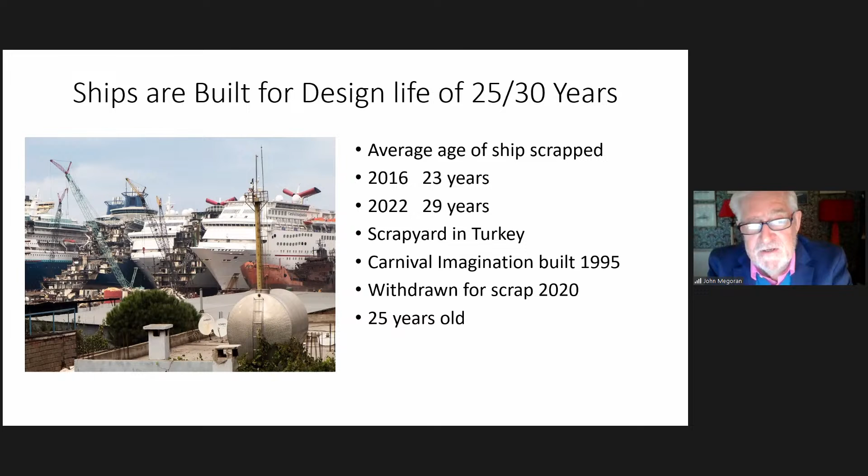So once again, 25 years old. There is this magic figure of 25 to 30 years as the design life of a ship. Of course, you can extend that by careful maintenance, really looking after it, not sending it out too much in the hurly-burly and such like. But basically, ships are designed for a life of up to 30 years, after which it is expected, generally speaking, that they'll be scrapped.

And of course, if you do nothing to a ship, they deteriorate readily. We have a good example with the Ryde, built in 1937. She had a major rebuild after the Second World War, having run as a minesweeper during the war. She was withdrawn in 1969, 32 years old, slightly over 30 years, but she had had that rebuild.

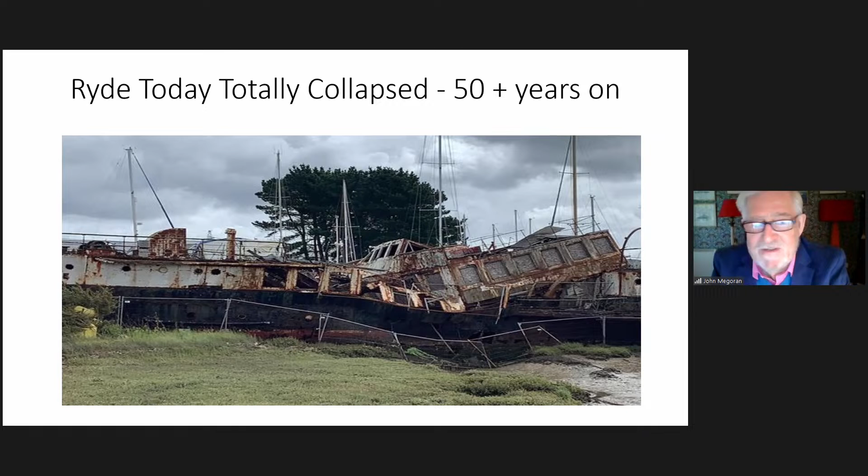Here's another example, the USS The Sullivans. She has been open in Buffalo Naval Park in America for some years. She was built in 1943, but she sank in April of last year. They knew that there were issues with her hull, and in fact, she had constant bilge pumps going on. But one night, the holes got bigger, and eventually they found that she had 53 separate holes, and she sank.

And that is also a good reminder of the importance of checking the draft marks on ships. I remember I used to always say to the crew on KC, check the draft marks when you come aboard. And I remember one guy saying to me, 'Oh, well, are you expecting the ship to sink then?' Well, no, I'm not expecting the ship to sink, but if it has got issues, I want to know about it sooner rather than later.

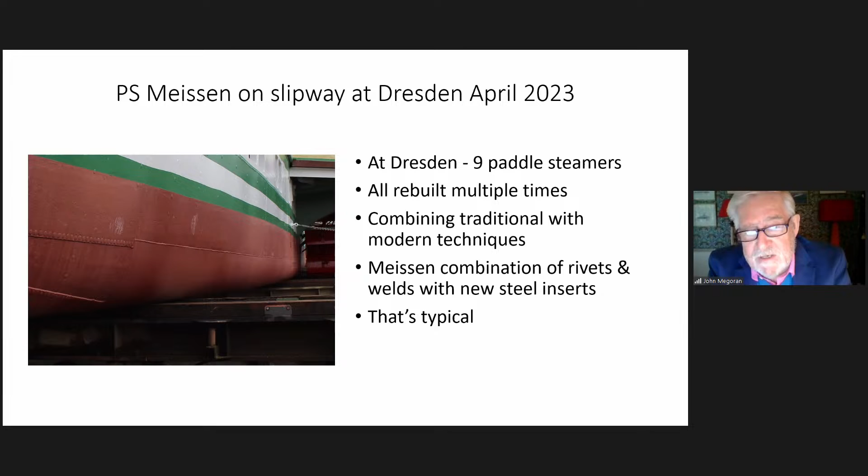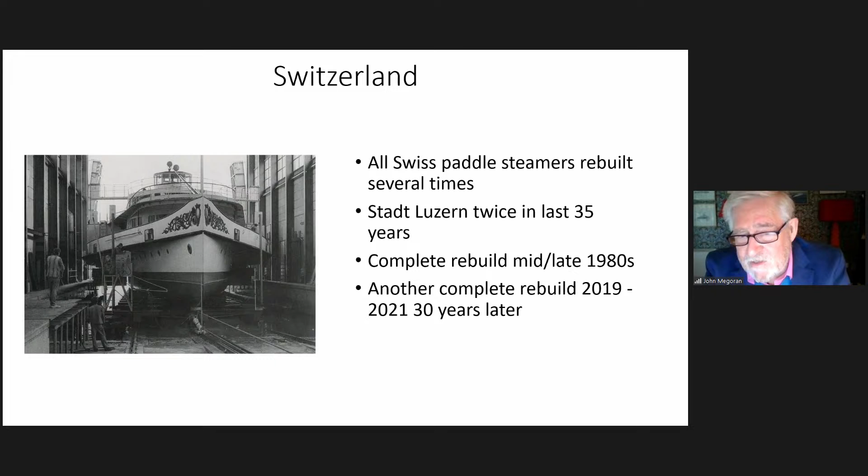As we know, all the Swiss paddle steamers have been rebuilt several times. The Stadt Luzern has been rebuilt twice in the last 35 years. When I first went there in the late 1980s, she had just emerged from a rebuild, and she was taken out of service for another complete rebuild, 2019 to 2021.

And the same elsewhere in Switzerland. Recent examples on Lake Geneva: the Vevey was rebuilt 2012-13, the Italie 2015-2016, the Rhone 2019 to 2021. And for this, they're taken back to nothing. The steel work on the hull is renewed as necessary. They don't renew steel if it doesn't need renewing, but they renew the steel that does need renewing, and completely redecked. And that really is the template for the work that we've done on KC.

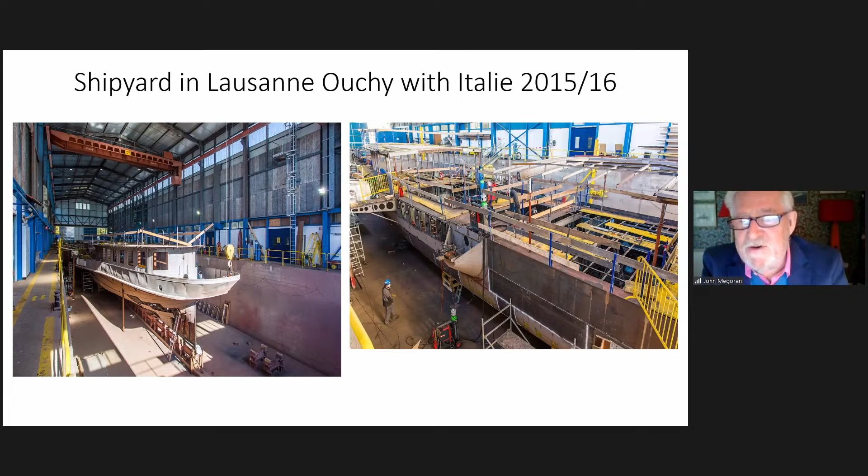And there is the shipyard, the covered shipyard at Lausanne Ouchy, with Italie there, 2015 to 2016. And that gives a flavour of the quantity of work that's going on. So when you go on the Italie today, you are going on a paddle steamer built shortly after the turn of the century, but a lot of it is different. The decks are not the same, a lot of the steelwork, etc., is different.

And of course, we all know our own Waverley. Built in 1947, she was sold at the end of her design life in 1974 when she was 27 years old. The following 25 years, there was an enormous amount of steel work done to her in the winters, and decks, etc. She had a new boiler in 1981. And then, as we all remember, a complete rebuild at Great Yarmouth in 2001. So if you want to keep ships sailing, you have to keep rebuilding them, and you have to somehow find the money to keep doing that.

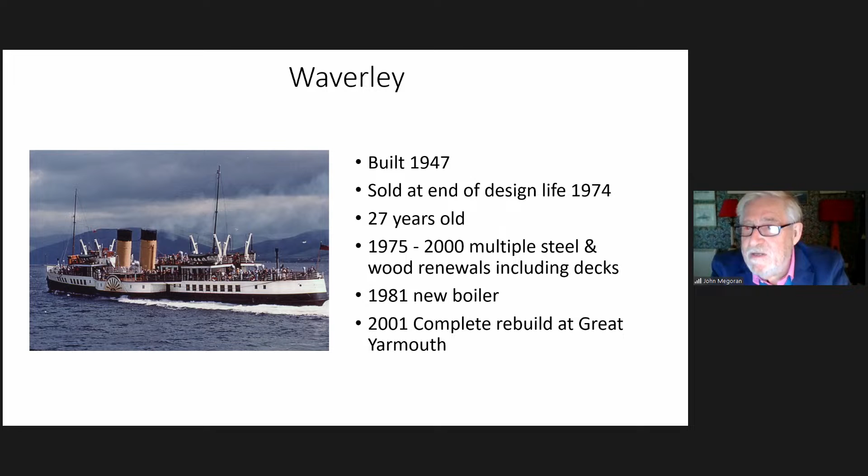So to KC. Well, she was built in 1924, and she was 36 years old, so she was already beyond her design life. Although during the war she hadn't run that much, but she was beyond the design life. To demonstrate this 30-year rule once again, the Board of Trade in 1960 was saying you're going to have to do major work on this ship if you're going to keep it in service. She needed hull doubling, she needed a new boiler, and so there were discussions as to whether it was worth doing the work or not.

At that time, the River Dart Steamboat Company had been taken over by Evans and Reid of Cardiff, and we have in our archive some correspondence between the two, with the Dart Company saying, is it worth doing this work given how old she is? And against the odds, Evans and Reid saying yes, go ahead, we need it. Because in 1960 the business was still quite buoyant on the Dart, with three paddle steamers with passenger certificates for more than 400. They could put 1,200 people afloat at any one time, and they needed that capacity. So she had that work done. In fact, the new boiler they put in was very handy when we came to start running KC on the Medway, because it had not had that much use.

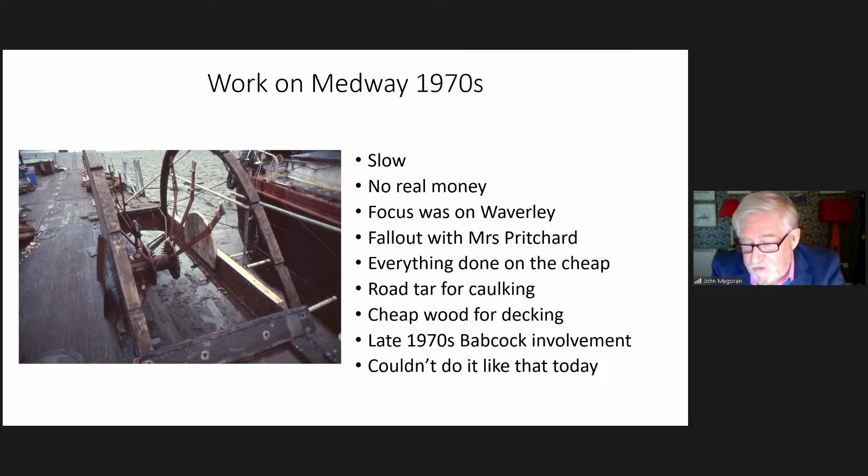It was really in the late 1970s when Babcock became involved and started providing real expertise to underpin the project that it really took off. But I don't think you could do it like that today, because today the MCA are interested in every facet of what's going on - you have to provide certificates for this and that, and make sure the steel is just so. So I don't think you could do that today. But they did, and all credit to them - huge respect for what was done in that period.

But it wasn't long before we discovered that really she still needed a lot of work. The hull condition - not really a lot had been done to the hull during the 1970s. And I remember one terrible day when I was chipping away with my hammer underneath, and my hammer went up inside the hull and knocked a hole in it.

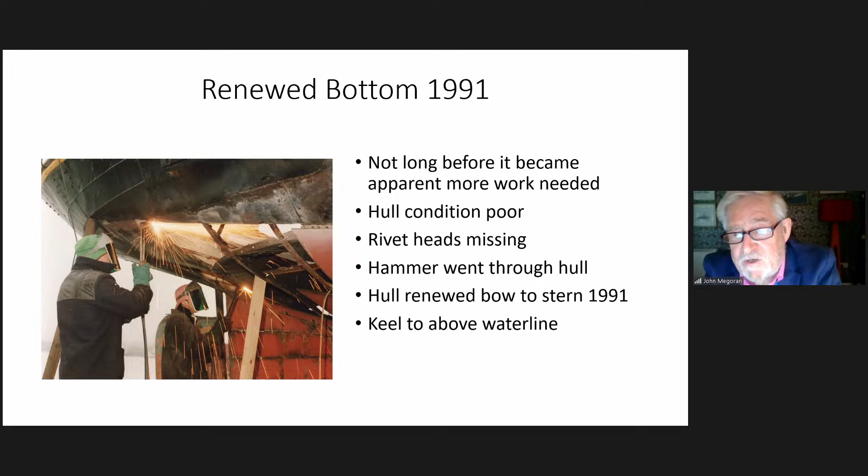And if you looked - I remember the MCA, or whatever it was called then, the Department of Transport surveyor, Mr. Ahmed, saying to me, 'John, there's a bit of hull here, these rivets, they don't seem to have any heads on them.' And he was right, they didn't. So in 1991, we got the funding to renew the whole of the bottom, and so the whole of the bottom was renewed from the bow to the stern and from the keel to about a foot above the waterline.

The 1961 boiler lasted very well, but by 1999-2000, the insurance surveyors were making issues with it, and so we put a new boiler in from Wellman Robey, pretty much identical, a carbon copy really of the earlier boiler. And we were pretty insistent that it would have the domed ends. Most modern boilers have got flat ends, like a Smartie packet with a thing stuck in each end. The traditional boilers had a domed end, which is better for expansion.

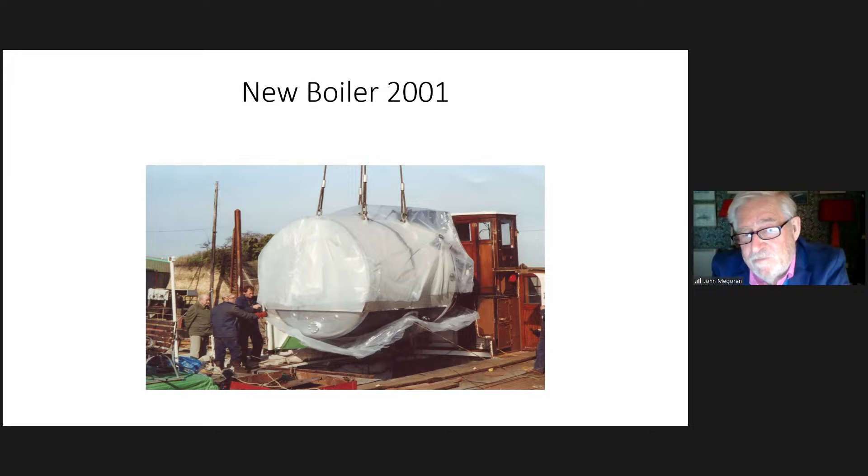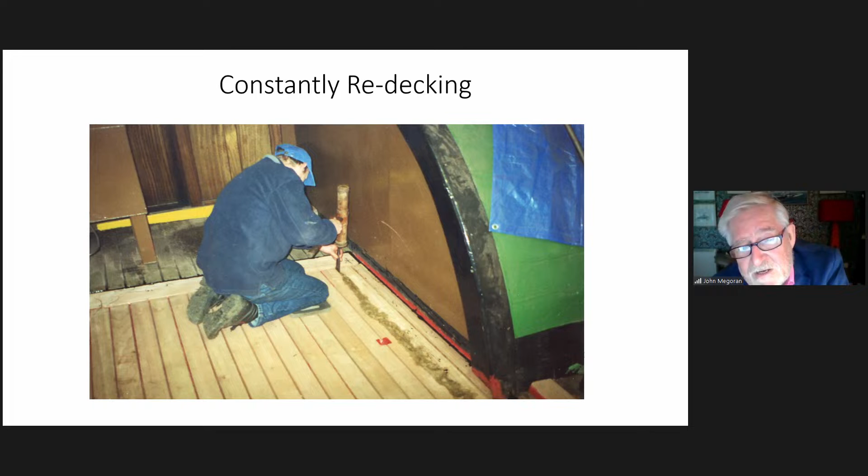Decks. One looks at decks and thinks, oh well, these go on forever, but they don't. We renewed decks in the Medway years more than once. And there is Chris Smith - some of you will remember Chris. He was my right-hand man at Chatham, a really great guy and huge contributor to KC, who very sadly died at the age of 62 back in September.

We had a legacy in 2001, and we used that to renew the sponsons there in the Acorn shipyard at Strood. And in 2008, some of the steel work around the bow above the level of the steel that we'd replaced was so bad that we actually put a completely new bow on in 2008.

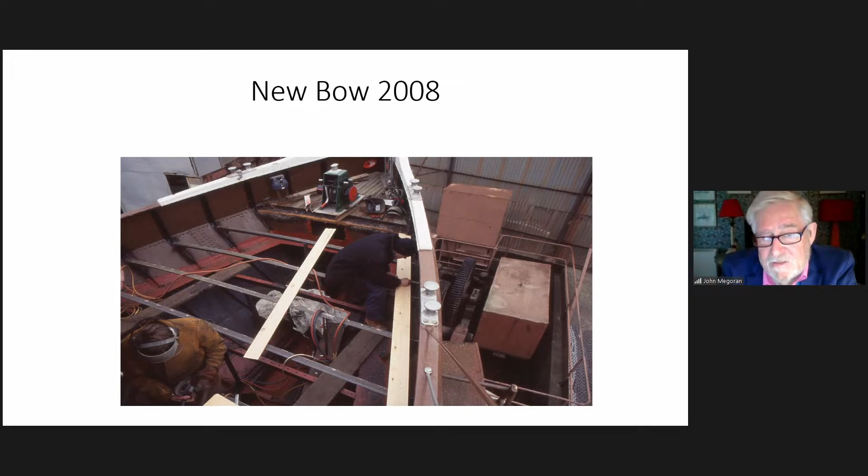And the paddle boxes, which had been renewed in the 1970s, they were falling apart by 2005. So there's Chris Smith again in his blue hat, renewing the steel work and then the woodwork around the paddle wheels.

One guy from the 1970s who was important in two respects, Laurie Beale. There were plans to get rid of KC in the 1970s because things were not working out too well, but Laurie stepped in, and with him there, that didn't happen. And Laurie's other main contribution was that he provided the paddle wheels. He worked for Stone Manganese, I think it was called, and they built these two paddle wheels free and gratis for KC. So that's a major contribution from Laurie, which lives on today.

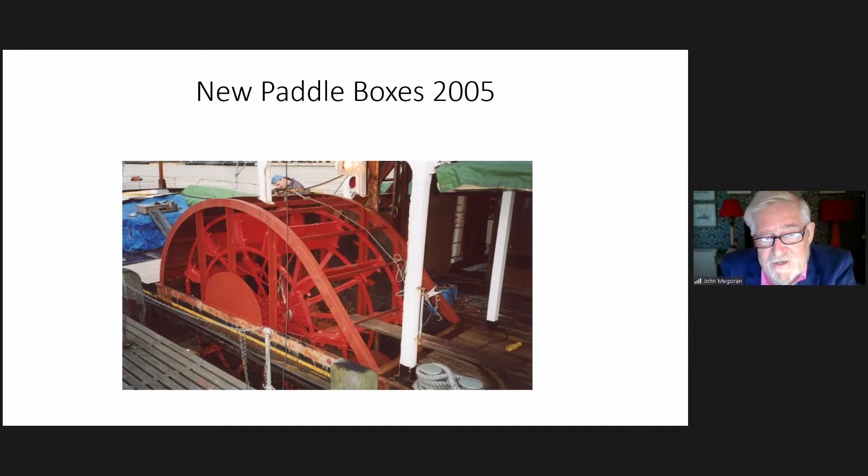And in 2010, we had commissioned a brand new coach roof. So there's a lot done in the Medway years to improve the ship.

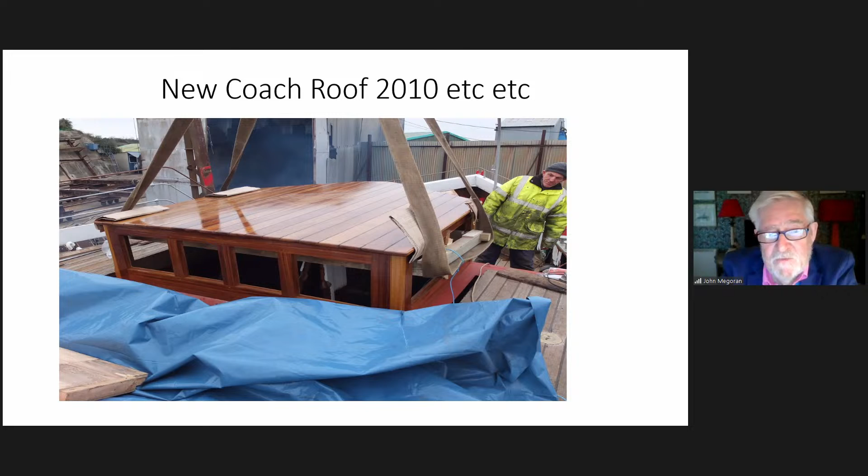Which of course then raises the question, why rebuild her in 2020? And we look at all the work that has been done previously, but in 1985, when we put it back into service, up to 2020, that's 35 years. That's again beyond the design life of ships. And remember KC, as we saw a moment ago, 1924 to 1960, that was 36 years, and they needed steel work on the hull and a new boiler.

And by 2020, the new hull plates we put on, they were 30 years old, so that's the ship's design life. And the frames and the bulkheads, the stringers and the keelson had never really been addressed. And our new decks were now starting to go rotten. Now, of course, amongst that, some of the work that we did was fine and hasn't needed addressing, as with the Swiss rebuilds - you don't replace everything just for the sake of replacing it, you replace what needs replacing. But after 30 years, a lot does need replacing.

But then there's the vexed question of how do you do it, which people exercise themselves over sometimes. Particularly, should it be done absolutely in a traditional fashion with rivets, or should modern techniques be used with welding? Well, the problem with rivets is it's difficult sourcing the necessary skills. Ship riveting hardly exists today.

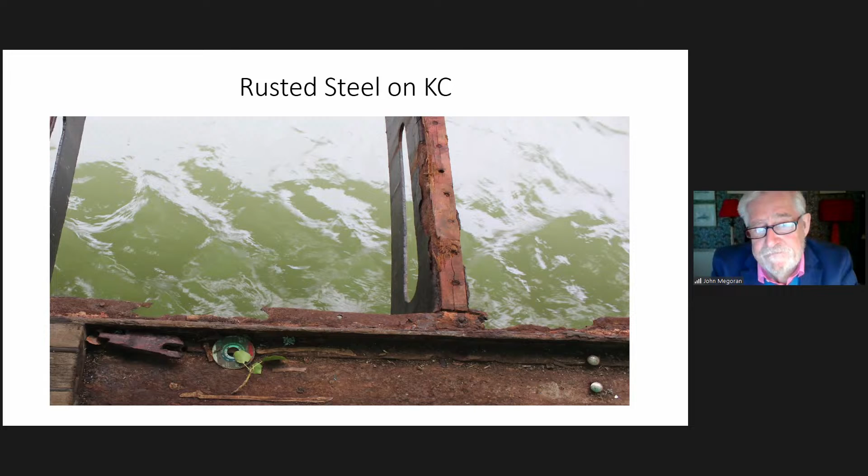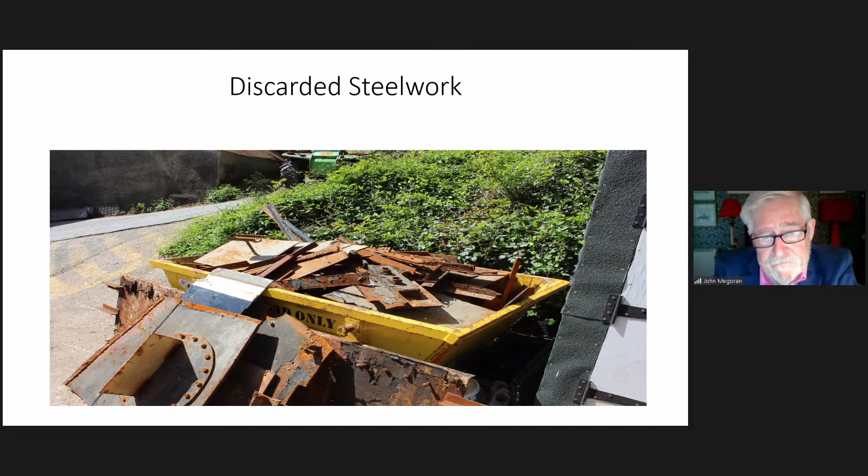And there is some of the discarded steel work which was cut out from the ship. And some of the new steel waiting to go in, which, as I say, now all has to come with appropriate certificates, etc.

One also needs to remember, in terms of the longevity of these paddle steamers, that they were often very lightly constructed, to keep the draft down so they could go to piers in shallow water. And when on the Dart, Totnes pretty much dries out - low tide, you can only get in there 2 or 3 hours either side of the high water. And so the steel plate is not thick.

I mean, KC's steel plate is 6 millimeters and 8 millimeters. It was initially built in strakes of 6 millimeter and 8 millimeter, etc. And if you get your ruler out and look at 6 millimeters, that's not terribly thick. So you haven't got to start getting much pitting before you're almost going through.

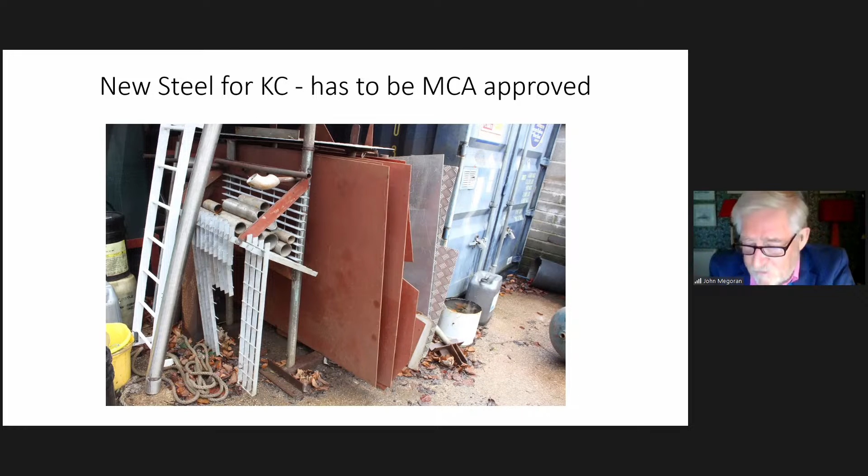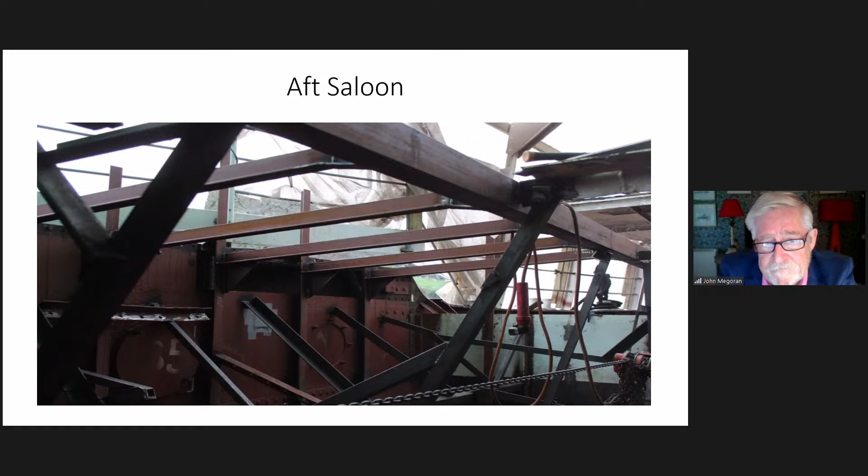As built, Kingswear Castle's deck all had steel tongues in it, and that gave added strength to the ship. We replaced that idea in this rebuild with putting in a thinner steel deck with traditional wood on top, so you won't notice any difference. But putting that steel deck in adds a lot of strength to the ship. One of the problems, particularly with KC, is that she hasn't got a lot of longitudinal strength.

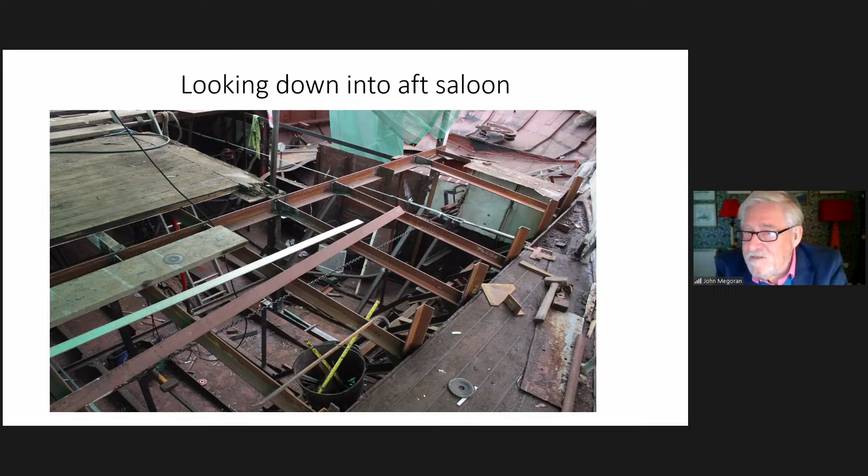She's quite a long ship, 112 feet, with no binding superstructure. Therefore, if you're in any sort of lop - and she wasn't built to be out in any sort of lop, but on the Medway and the Thames she sometimes was - the bow and the stern being lifted up at different rates causes flexing. Not massive flexing, but flexing. But anyway, this hopefully will strengthen the ship, has strengthened the ship considerably.

When we did the bottom, it extended only about a foot above the waterline, and the bit above that, from the new steel up to the deck, was original. And we found, as the years went on, that some of that was getting very iffy, particularly up underneath the deck, and those surveyors know just where to look for these things.

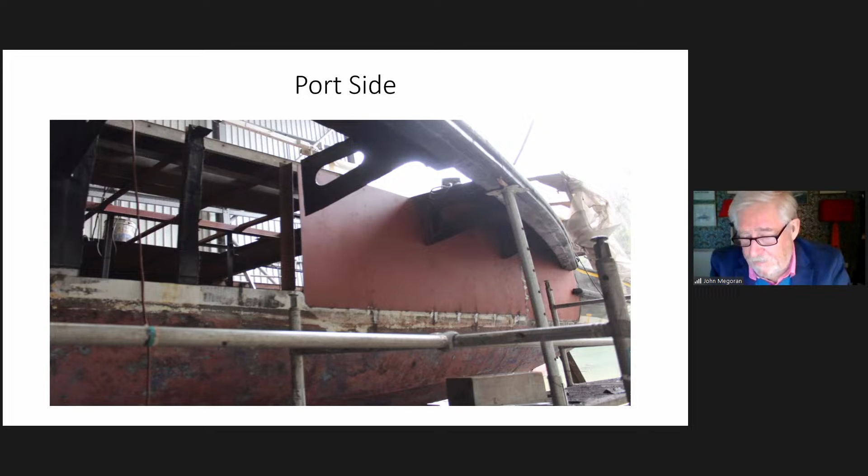Surveyors would go around with a hammer, bang, and the hammer would go through. So we have renewed, from the engine room to the stern, that strake beneath the deck, and you can see there on the right side the new steel being put in. And there it is, painted with that anti-corrosive grey paint.

A lot of the hull from 1990 - we had to put some inserts in some places, but on the whole that has lasted not too badly.

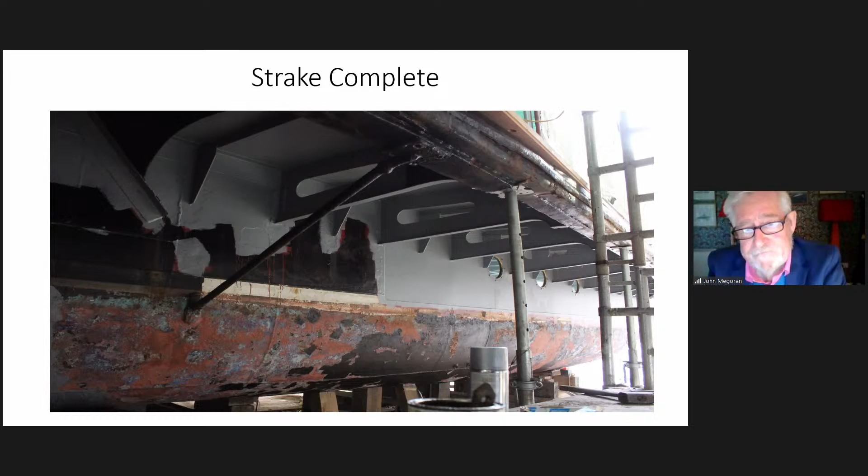And here we are back up on deck again, looking at the structure, putting in steel in readiness for putting the wood on top.

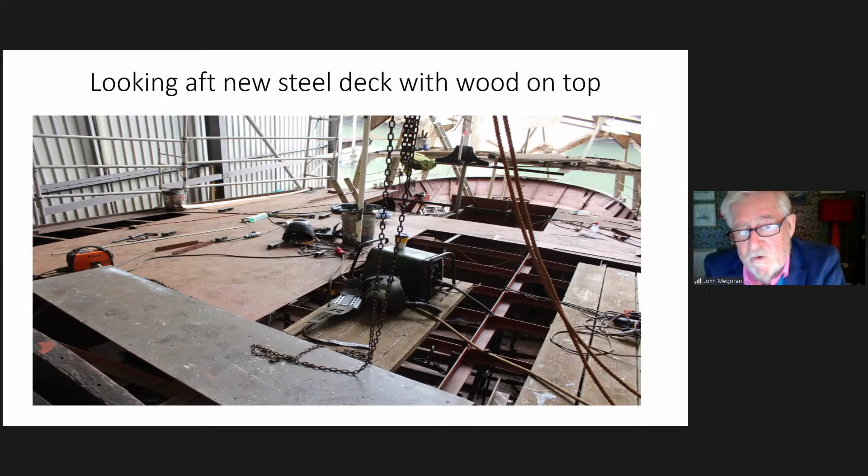And here we are now down in the bilge. She was very lightly constructed - the frames had never been addressed. When we did the steel hull in 1991, we did frames a little bit, as and where absolutely necessary, but they weren't all redone. But now they have been.

Now you can see the extensive work that's been going on to strengthen the ship up. There we are in the aft saloon, looking forward, and you can see the frames there have all been redone, and there are new stringers and a new keelson and new bulkheads. All of the bulkheads have been renewed throughout the ship, and the bulkheads were getting a bit iffy, really.

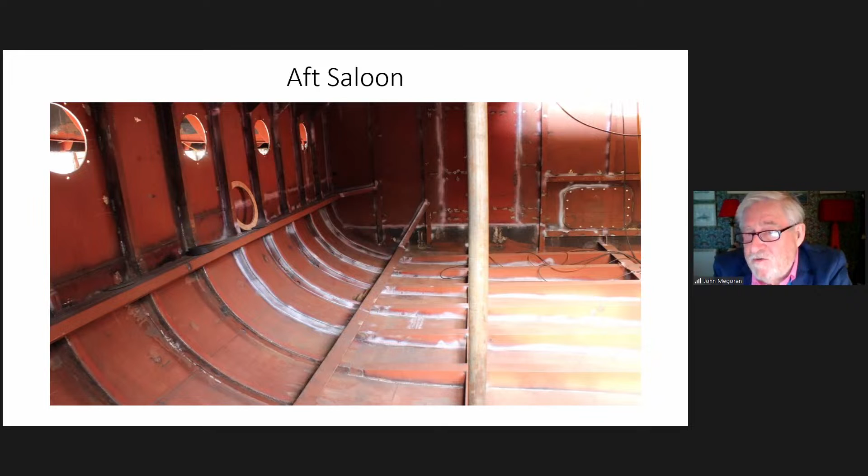They were all ever so slightly bent due to the flexing of the hull over the years, and certain parts had to be patched up. This bulkhead, its predecessor, had a number of patches we had to put in over the years when surveyors' hammers had gone through. But now we've got new bulkheads throughout, and they've been strengthened by having vertical supports welded to them.

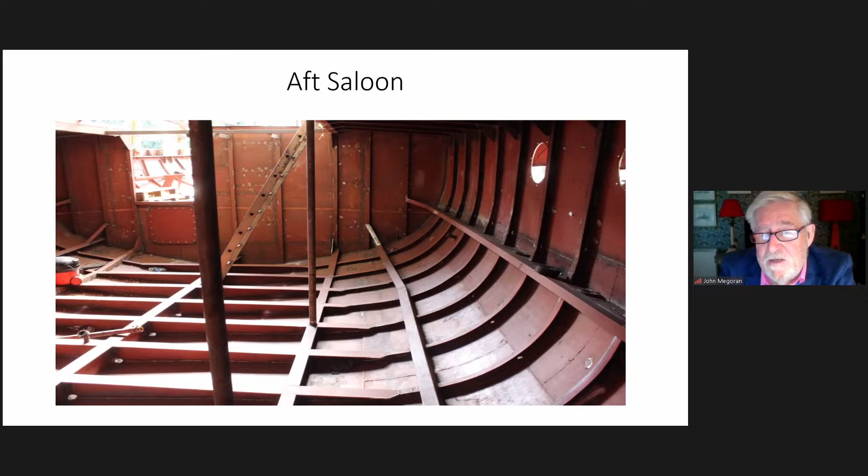We're looking aft to the aft saloon door. You can see the new stringers there, and all the nice work on the frames. On the right-hand side, with the porthole cut at that moment, you can see the new steel that's been put in for that.

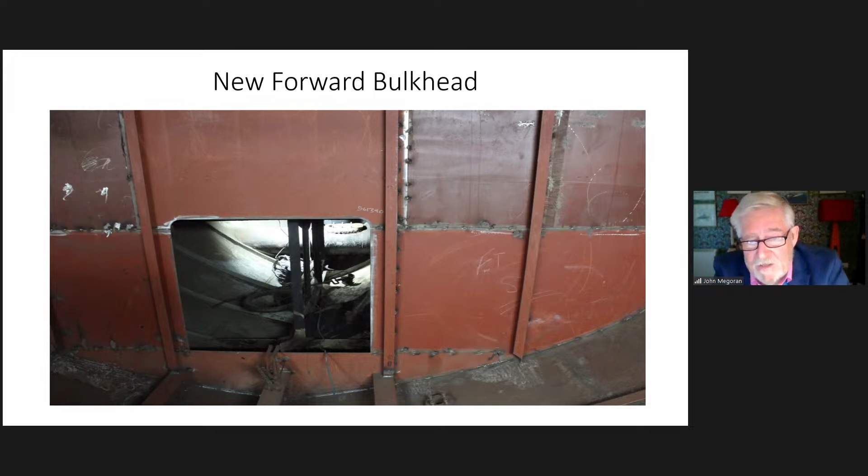So there's been an enormous amount of work going on so far. Here we are in the forward saloon, a similar sort of situation, and that's the forward bulkhead.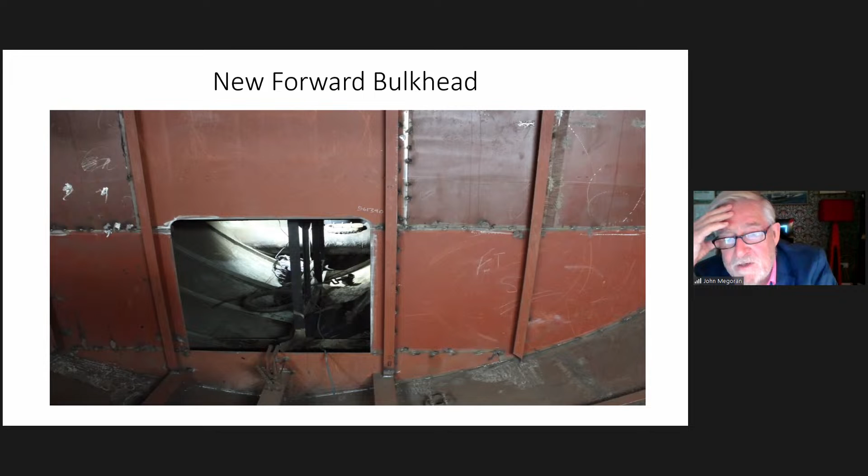One thing we are doing in this rebuild is relocating the bow thruster, which we put in some years ago. We never use it very much, but it's a handy thing to have. We've moved the bow thrust engine from the engine room into this compartment underneath the foredeck, which removes the fire risk of having a hydraulic engine in the engine room, and hopefully it'll quieten things down being kept in this compartment.

Forward saloon again. There we are at the aft end of the forward saloon, looking forward.

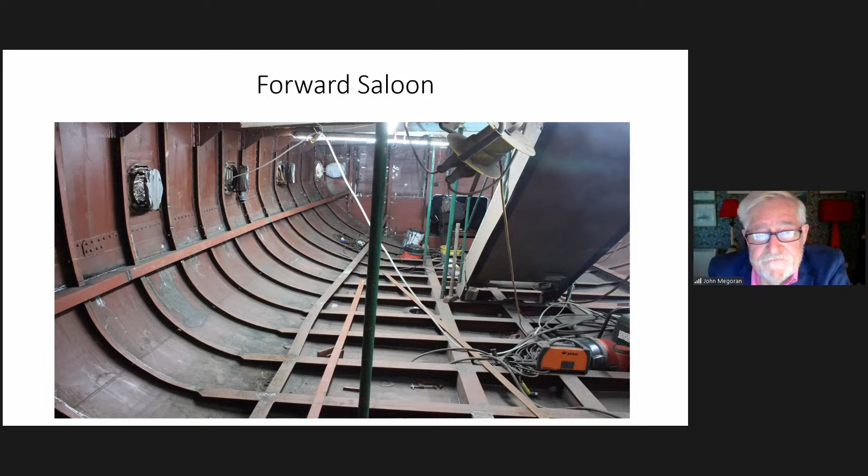Their attention to detail is excellent, really - it cannot be faulted. I think we are really lucky to have had this company working on our ship, because they don't charge us for their own in-house labour. We're working with them as partners for the use of the facilities, etc., which has really kept the costs down.

Those are two bunker hatches which Richard James has built for the ship. They're sort of a yacht-like finish, really, I think.

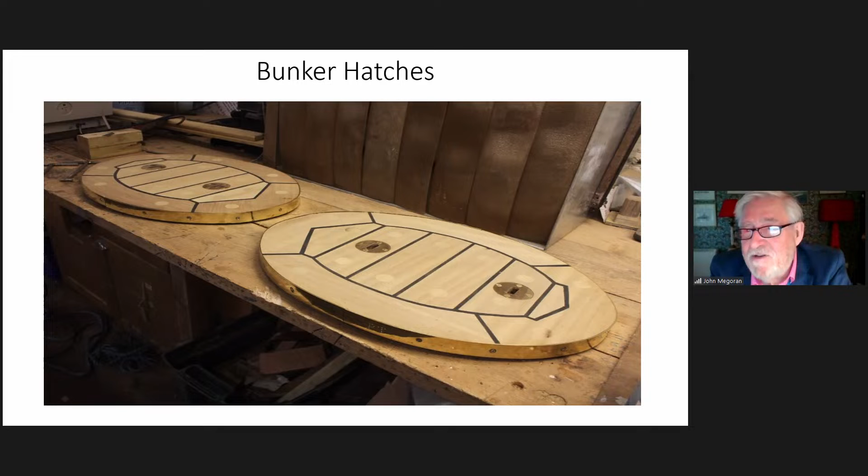They have their own varnishing shed at Dartmouth, and that is such a boon. In the Medway years, doing the varnishing was always difficult - you were outside and it was cold and wet and such like. For good varnishing you need an ambient, warmish temperature, and they have their own shed for this there.

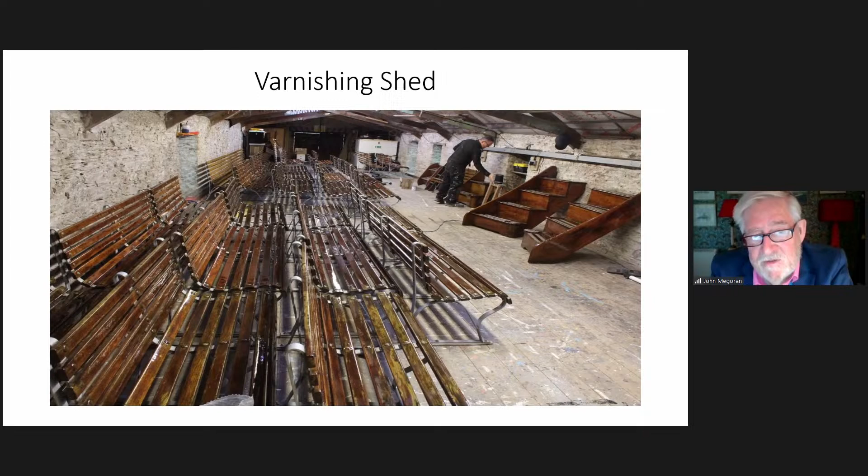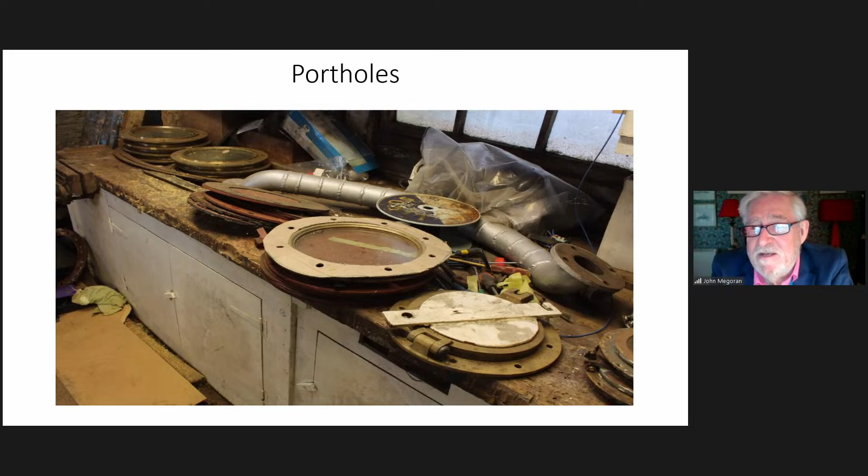The portholes all came out and were addressed, and have now all gone back in again. I remember somebody pointing out, looking at a picture of the portholes having just gone in, 'oh look, they've all been polished' - which they had.

Other work's gone on. The boiler feed pump on the right has been away for a major service, and on the left you can see the engine room telegraph there, which is in the workshop for work.

You need pumps, obviously, to pump the water back into the boiler. KC has a variety of pumps for this. That pump is used for pumping feed water from our feed tank. There is an engine-driven feed pump, which pumps the water back into the boiler as fast as the steam is being used, and there is a general service pump which can be used for that as well.

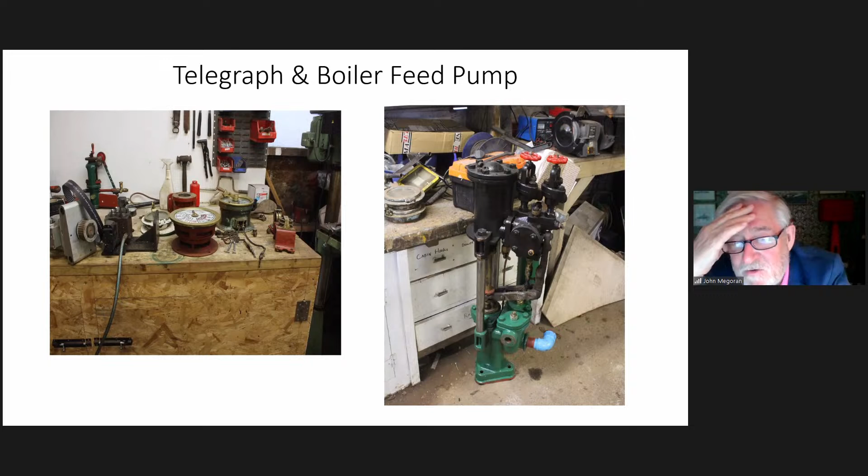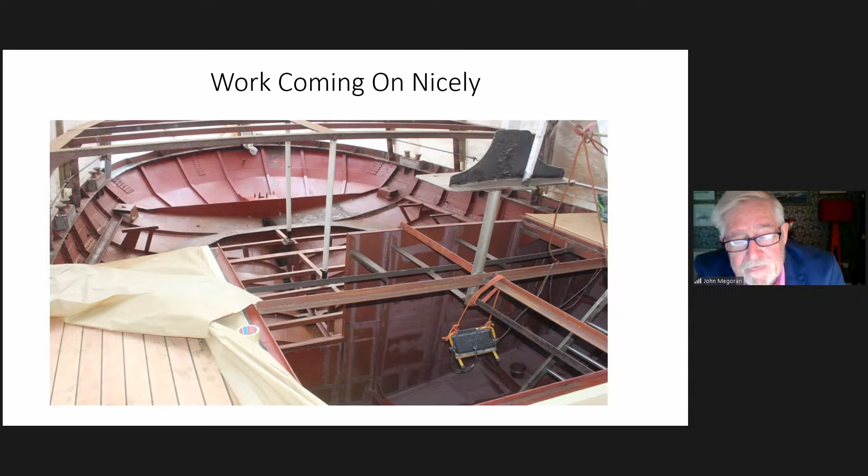But here things are coming on now. We're looking aft, and you can see the new deck which has been laid on top of the steel there, on the left and on the right, and looking down into the well deck.

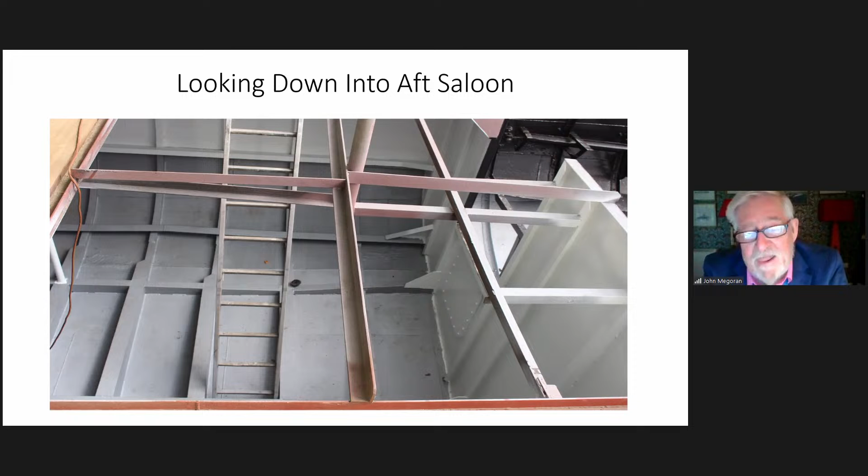We've now got some anti-corrosive paint going on. I look at this anti-corrosive grey paint, and it immediately makes me think of Switzerland, because that's exactly the same sort of grey anti-corrosive paint they put on the inside of their paddle steamers when they rebuild and refurbish them.

And we're looking into the aft well deck again. You can see the new deck, which has been laid on top of the steel work.

I think it's also interesting to look at how little there is of KC beneath the water, really.

Now, one issue with KC is the freeboard. The MCA have a minimum freeboard, not surprisingly, and KC's least freeboard is in the aft well deck.

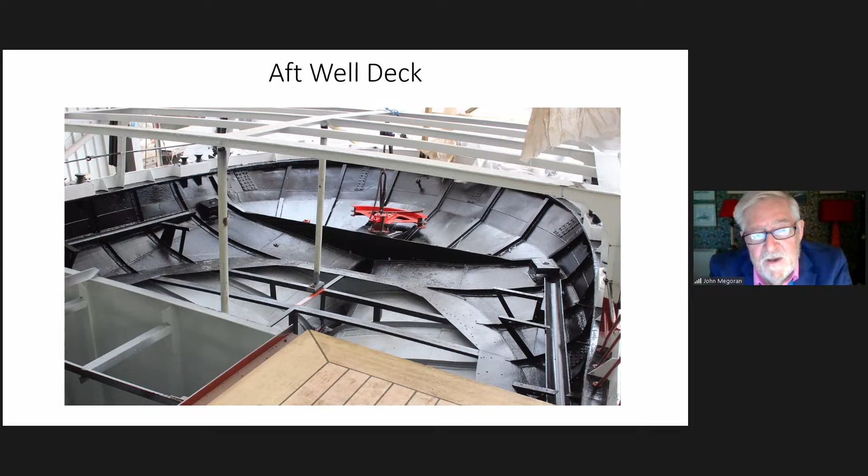We have had a naval architect working on the project with us and advising on it. In a sense, we've been adding weight, putting in beefed up frames and so on, but there's a balance with, for example, the decks. You'll put in steel decks, but the wood is not so thick, etc. As a belt and braces measure, we've raised the freeboard in the aft well deck. If you look closely at the top of the gunwale, there's that white strake with the mooring bitts on it. We've increased the freeboard by that amount just to be on the safe side moving forwards.

To everyone's relief, she didn't leak. Obviously, that's tremendously important when you put a boat in the water after you've done this amount of work. You have to be looking around all the time, at every nook and cranny, just to make sure there aren't defective welds letting through water.

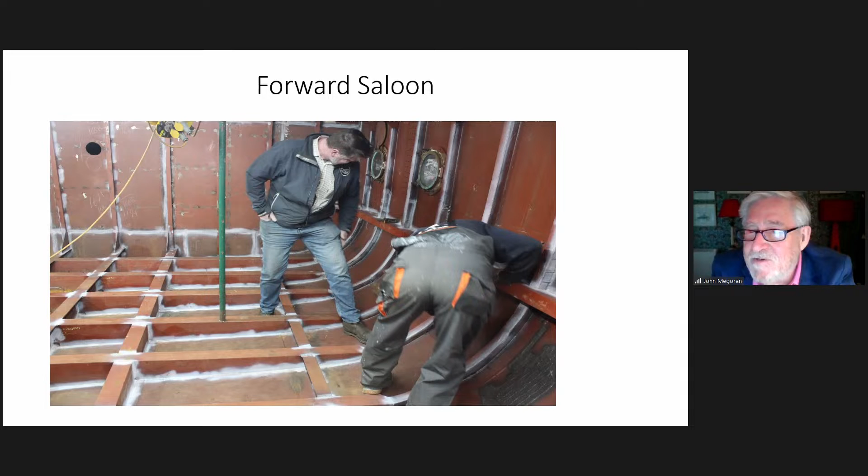Here we are in the forward saloon, once again looking aft. The hole in the bulkhead there, the little hole for a porthole, Chris Smith put that in, or wanted that put in, in the Medway years, so we could pass cups of tea through from the tea bar into the engine room. That is a completely new bulkhead from those days, but we have retained the tea passing hole.

There you can see the bow thrust motor about to go through the hole into the compartment underneath the foredeck.

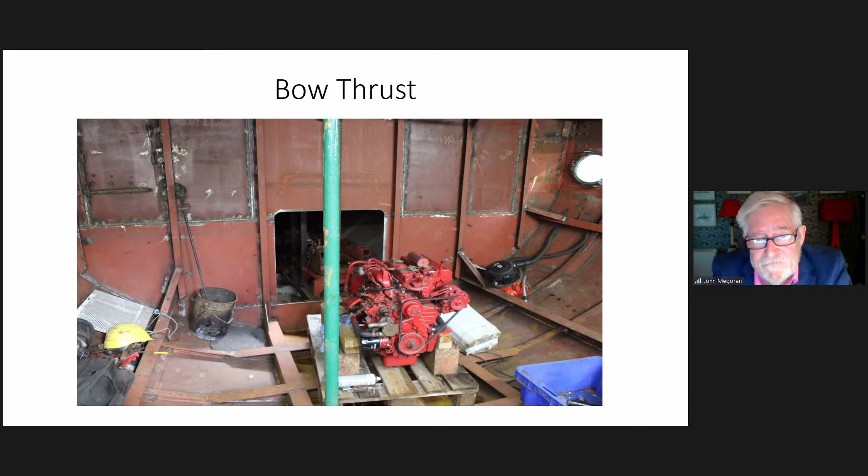But that will almost certainly mean that we have to do a revamp of the lavatories on the ship. I think particularly we want to try and get all three of the lavatories together rather than the current situation where they're in the two different saloons.

There we are again in the aft saloon, looking aft. Again, you can see that KC had no bilges really. When you're standing in the saloon, you're standing almost on the ship's bottom. And there we are in the forward saloon, with nice grey paint and all those new frames and stringers and such like.

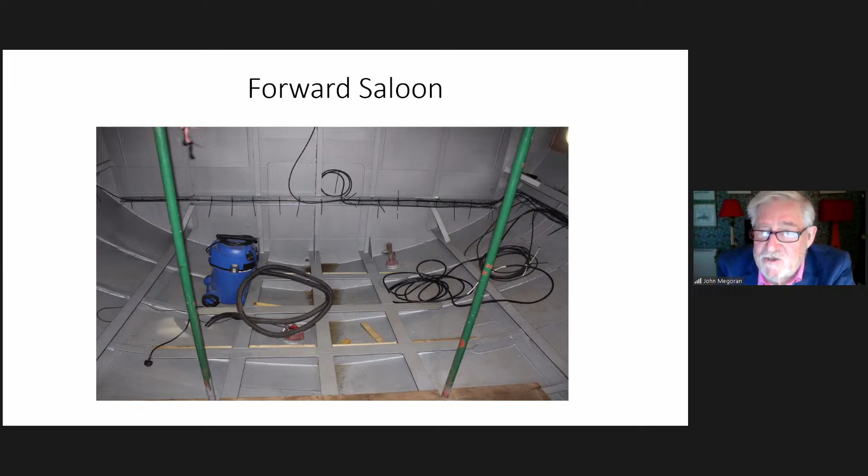Another thing we're doing is removing the life rafts. Before about 1993, ships in KC's class weren't required to carry life rafts. But when that became a requirement, we put them aft to keep them away from the paddle wheels. But they're big, heavy structures, and that's in the area of the lowest freeboard. So in this rebuild we are moving the life rafts, replacing the round pods with flat pods, which are less obtrusive, and putting them on the bridge wings, where they can be hidden by the canvas dodgers.

By April, steam was raised and she ran trials, so she had been out since this work. I'm pleased to say that everything worked, because one didn't want to find the engine was madly out of alignment or whatever after it, but everything worked very well.

To do that, she obviously had to have the steering rigged up. One thing we're not doing like the Swiss boats, which have all got hydraulic or hydraulic-electric steering now, is change the system — we still have the good old fashioned wire and chain, with chains in the wheelhouse connecting through wires down to chains right in the stern.

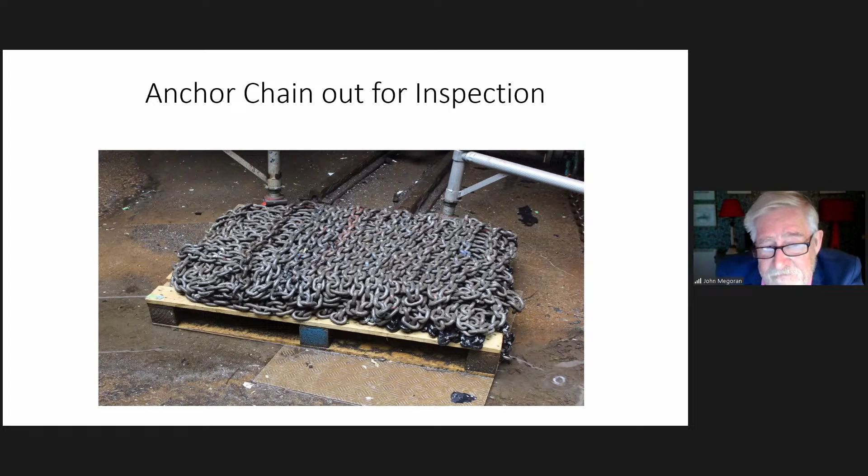The paddle boxes are being scraped down and will be painted up again for the new season.

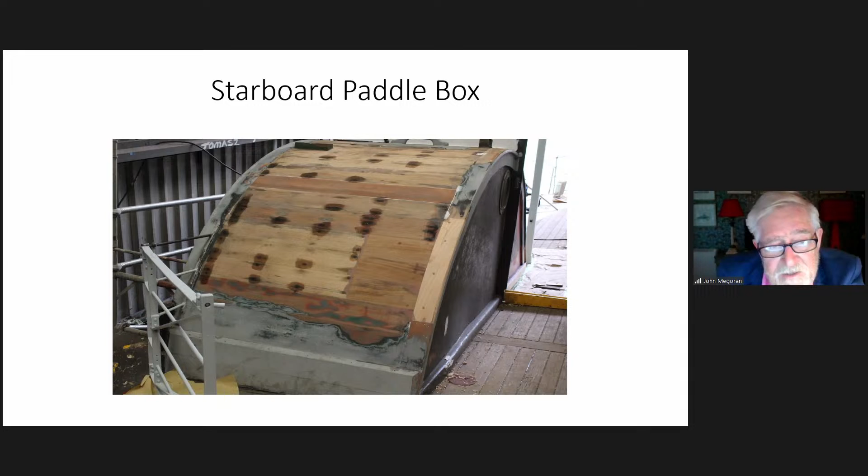There on the starboard side, you can see the strake underneath the deck, which was renewed this year. On the top left, you can see the extent of the white, which shows how we've increased the freeboard there. It's the same on the port side. It's not a lot of increase, but I think it was important to do. I don't think people are really going to notice it. It looks as though one might have put a canvas dodger along there.

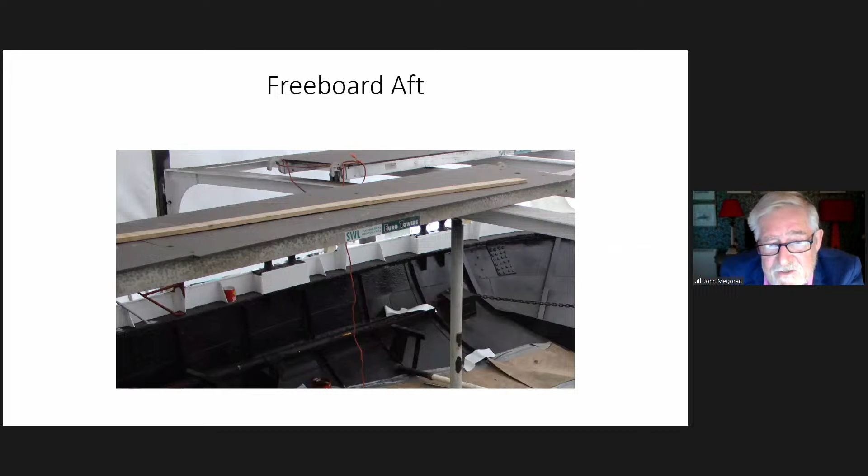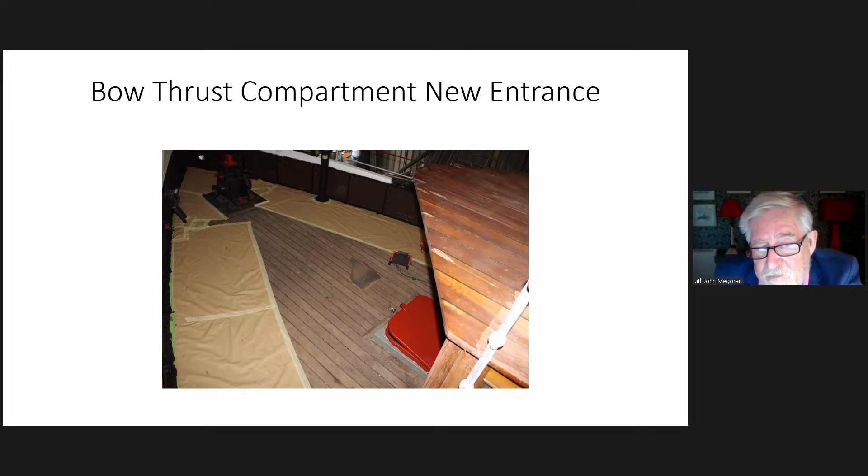So where are we now, and where are we going? By the return to service this summer, we will have completed all the steelwork, including the hull and decks, from the engine room to the stern - that's all done - and all the steelwork to above the waterline from the engine room to the bow. Back aft, the strake beneath the decks has been done, though not ahead of the engine room. We've renewed all the bulkheads throughout - every single one is now new - and we've renewed all the stringers, keels, frames, etc. That has cost us only around 500k, well, not quite 500k.

For next winter, we're looking at completing the steelwork strake below the deck forward of the engine room, and renewing the foredecks, all the decks up to the bow, at a cost of around 200k.

The spend to date has been about 400,000, which is a pittance for the work that's been done. If you compare that with the Swiss, to rebuild a Swiss paddle steamer you're looking at 12 to 15 million pounds for one of their larger paddle steamers. Scaling that down to KC size, you're looking at 2 to 3 million pounds.

So the work has been done at a knockdown in-house price, and a lot of credit for that has got to go to Dart Pleasurecraft and the Dart Railway, contributing their facilities and the use of their labour. The biggest costs really have been external contractors brought in to do the steelwork, etc. But it's still been done very much on the cheap by commercial standards.